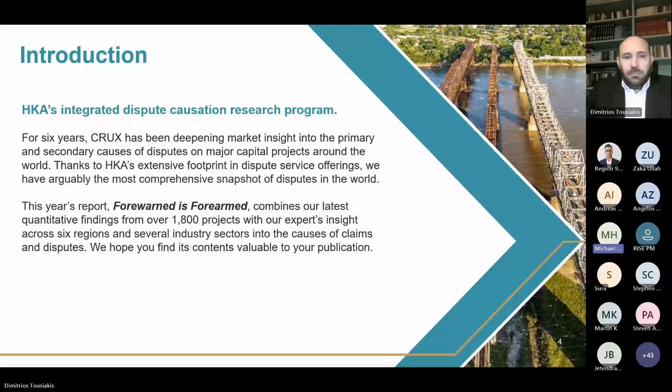So what is Crux? Crux is our own internal research program. It looks at the primary and secondary causes of disputes on major capital projects around the world. This year's report is called Forewarned is Forearmed, and it looks at about 1,800 projects worldwide. The Crux report gives us that insight and examines those causes of claims, disruption, and disputes on major projects.

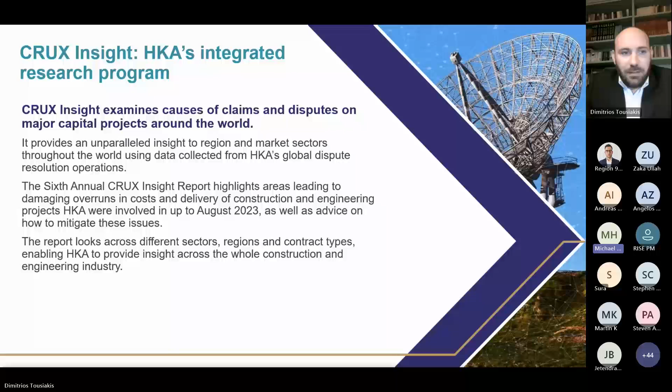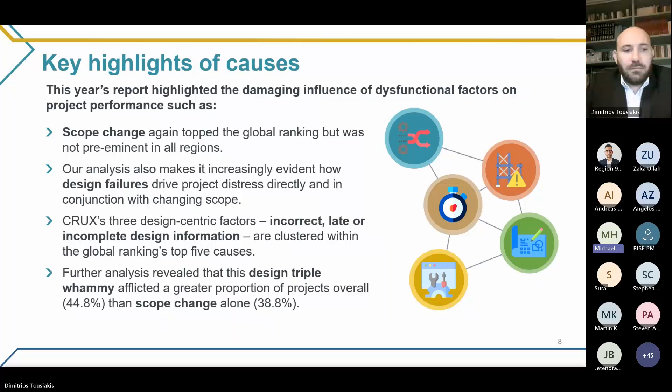We've highlighted scope change at the top. But as I mentioned, the incorrect, late, or incomplete design information, when combined together - that triple whammy - shows that design-related delays and claims are in excess of what we're seeing in scope changes alone.

Now we're going to come on to linear projects. What do we mean by linear projects? The characteristics of linear projects are longitudinal, spatial, and repetitive construction activities - for example, tunnels, pipelines, bridges, rail and transport, and roads and highways. That's how we classify it under our Crux data. It's the repetition of those activities, and it's highly dependent upon efficient production rates and optimum resource utilization for those repetitive activities. That's the key thing to consider there.

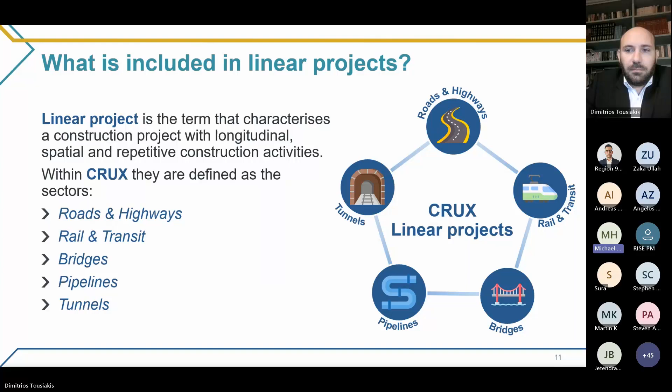Average cost is pretty much the same there as well. Now, when we look at the actual top causes...

We have change in scope being relative to both cases, but that's where it starts to diverge slightly, because obviously in linear projects, there's more restriction with access, maybe in terms of physical conditions where they were unforeseen, and design being incomplete, or indeed the design information being late.

Now, is that because there is a less series of activities there in comparison to the non-linear projects? We'll leave that one out there for you to have a think about, and maybe when Dimitrios explains his content, that will become even more apparent.

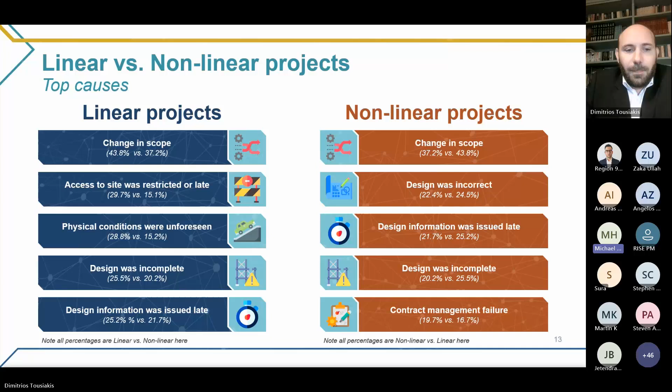So whilst we have got activities there with scope change and design issues quite heavily biased in the top 5, there still remains that human-based element of administration of the contracts that causes a dispute level situation.

How does that reflect with the projects you're actually on? How does the data that we see in our sectors, in our geographical locations, compare to your own? It would be interesting for anybody to give their feedback on that, on what they see and if it's comparable on their own project.

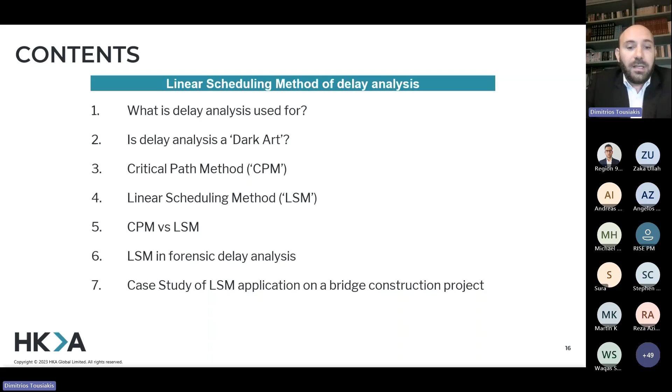At the end, I will present a case study of linear scheduling method application on a bridge construction project, in order for you to understand a bit better and see the graphs and graphically understand how LSM can be used. But first of all, let's start from the basics.

What is delay analysis used for? In general, delay analysis is used for examining the time loss of a project or an activity. In order to assess the impact of the changes and delays on a project, someone needs to carry out a delay analysis.

This involves a critical path analysis, where we identify the critical path activities, which then enable us, and the legal teams, to focus on the critical delay events and save time rather than investigating all the delays of the project. As you probably know, there are a lot of delays in various areas of the project that require factual investigation, which is time and money consuming.

So finally, delay analysis is also used by the parties in a dispute to support or defend an extension of time claim, and by the delay expert to support their expert witness evidence given in court, arbitration, or other proceedings.

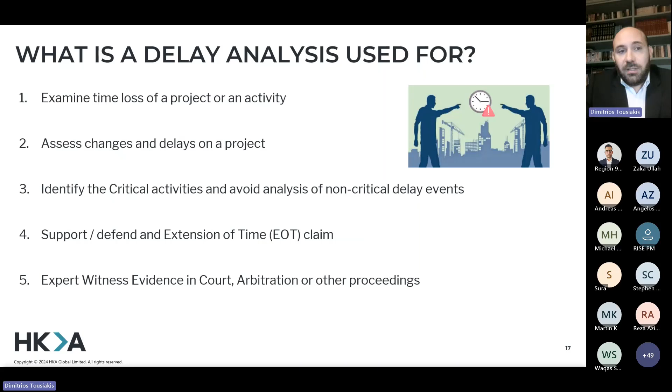So this is what delay analysis is used for, but I'm pretty sure many of you have heard the term, 'oh, delay analysis is a dark art.' Is it really? Or should it be really?

Delay analysis methodologies have different names. For example, the AACE International recognizes 9 different delay analysis methods, while the Society of Construction Law Protocol recognizes 6. In many cases, there are just different names for the same thing, or different things with similar names, and this creates some confusion.

But why should we complicate things? Tribunals, courts and arbitrators prefer non-complicated and easily understood delay analysis. These typically rely on factual evidence, some basic engineering principle, and most of all, common sense. People need to understand what went wrong practically and what delayed the completion of a job.

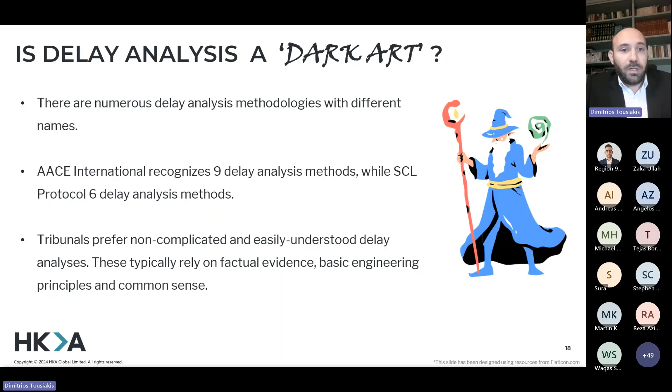So the key takeaway is delay analysis is not and shouldn't be a dark art. It should be easily understood by a layman, someone who has not been involved in the project. But how do we do that? That's the million-dollar question.

Typically, the method that is mostly used and people are more familiar with is the one used by planning software like Primavera P6 or other similar software. This planning software is the most known and used scheduling method in construction management, and you come across it in most cases where people use this software.

With this method, schedules are prepared by inputting data for individual activities - for example, the duration of an activity, the dates, the logical relationship and dependencies between the activities, etc. You put that into the program, and the software then automatically applies algorithms to calculate the free float, the total float, the critical or near critical paths, and the projected completion date.

So the critical path method is a valuable tool that can display graphical visualizations, normally in the form of a Gantt chart, like the one you see on the right-hand side of the screen. These Gantt charts are like a one-dimension overview. Basically, you have the time on top - here are the dates, and here are the activities.

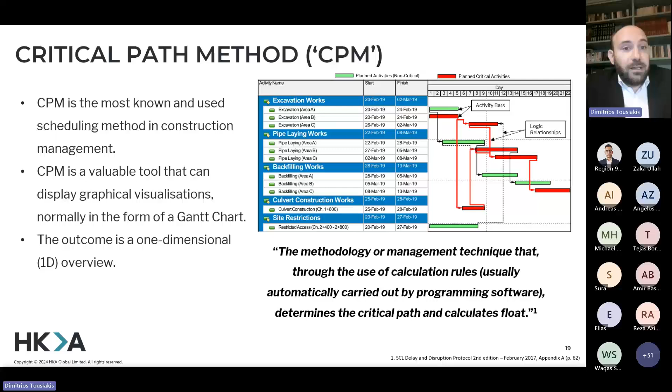Now, what is the linear scheduling method and how does it compare? The linear scheduling method graph displays 2 axes, one for time and one for location, which is the chainage basically. This is a less known method, used for scheduling linear projects or where repetitive activities occur, and optimal productivity rates are essential to achieve timely completion.

As you can see, the graphs are 2-dimension graphs. We have time on the y-axis and location on the x-axis. Using exactly the same example from the previous slide - the same pipeline project, divided into the 3 areas here at the bottom - you can see how things were planned to happen. So here's day 1, 2, 3, etc.

And you can see in brown is the excavation. So excavation in area A was planned to start at the beginning and finish on day 5. At the same time, the excavation in area B would start and finish at the same time. However, excavation in area C would start on day 7 and finish on day 11. Then after doing the excavation, we can see the pipe laying activities, the backfilling. So these gradual lines are the activity lines - here we can see activities that happen in a specific area.

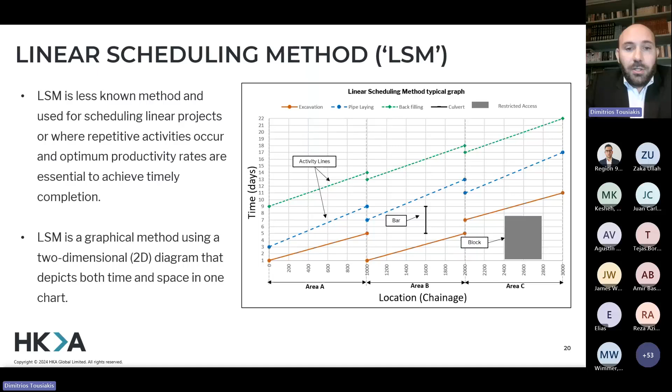So to summarize, the difference between the critical path method and the linear scheduling method: the critical path method creates one-dimensional graphs, which do not visually provide information about the physical layout of the site or any potential constraints or other parameters, and doesn't visually and easily demonstrate the productivity rates for construction activities.

On the other hand, the linear scheduling method is a two-dimensional diagram that enables the avoidance of impact from space restrictions, as we discussed, like the construction of a culvert or site access. It demonstrates and helps achieve optimum productivity for all activities, and ensures that one activity doesn't adversely impact the production rates of the others.

With this method, we can ensure continuity and uninterrupted working of resources by moving the resources from one location to the other. And it's easier to understand from the linear scheduling graph compared to the critical path method.

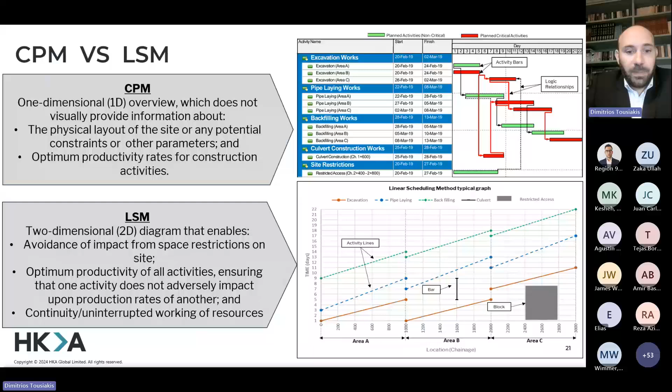So this was for planning of a project, but how is the linear scheduling method used for forensic delay analysis? As you know, construction dispute resolution processes often require a retrospective delay analysis to demonstrate the effect of the delay events. So basically, the analyst or expert needs to look backwards to understand what happened.

The linear scheduling method used for forensic delay analysis of linear projects can display valuable insight of the actual progress of the works in relation to location. And this is the big benefit here.

The LSM can graphically depict the changes in production rates by seeing the change in the gradient of the lines and the interrelationship between the resources, locations, and duration. LSM visual representations are easily understood and read, even by those with little or no experience in construction programme management or project-specific details.

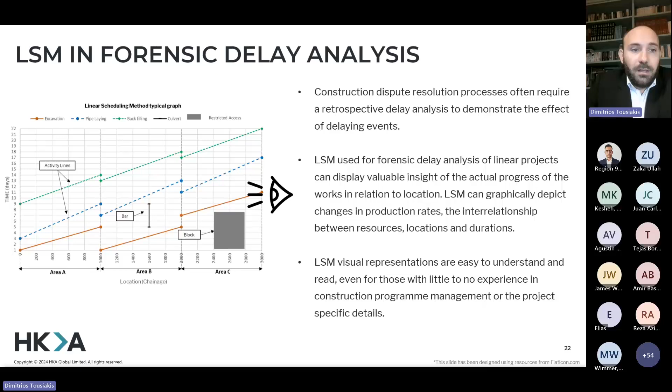So I hope you understood what LSM is in general, in principle. I will try to explain this even better through a case study where we applied it during a forensic delay analysis of a bridge construction project.

The bridge was constructed by application of the span-by-span bridge construction method. As you can see in the photo to the left, we have the piers constructed, and then the launching girder on top, which erects and creates the platform segments. As it creates the bridge, the launching girder moves forward till the end and continues. On the right-hand side is a graphical representation of this.

The construction sequence starts with the underground piling foundation. Then we have the construction of the piers. And on top, we have the launching girder, which erects the platform segments and creates the platform.

So you understand that in order for the bridge to be completed, the main activity we should track to see how things were progressing is the erection of the platform segments by the launching girder, because this is how the bridge is constructed.

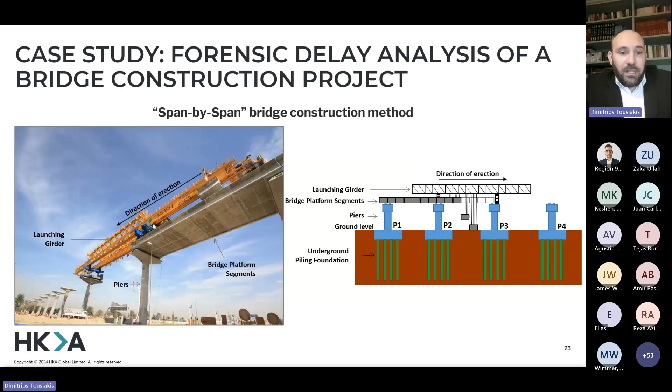So what we did for this analysis, we created a two-dimensional time-chainage graph using the linear scheduling method. You can see on the left, as we discussed, the time, the months of the year, and at the bottom the location, the chainage. This shows only the planned and actual bridge platform lifting by the launching girder.

So observations: just by looking at this simple graph, with the dotted line, you can see that the plan was to start in July '13 and, with this production rate, finish in October '14. So there was a planned duration of 15 months starting from location A to location G. Now, this is what actually happened, which is the continuous line.

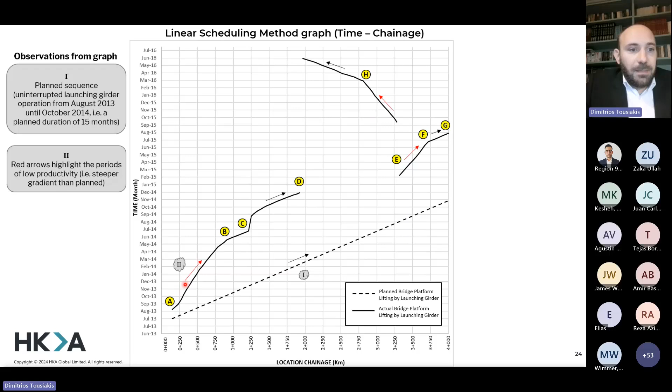The red arrows highlight the periods of low productivity. The steeper the gradient, the more it shows that things were delayed. So whatever is vertical, whatever goes up, is a delay. Whatever goes flat means it was completed more quickly, or according to the planned rate.

Here you can see this took longer to be constructed, while this was according to the plan. This period here, for some reason, had lower productivity, lower rate of progress, and then this was as planned, etc., etc. Observation number 3.

At the beginning of the project, there was 1 month of delay. So instead of starting in July, it started in August. Then we can see here that the launching girder reached location C, where there was around 3 months of stoppage. This is another observation.

Then the launching girder proceeded to location D, where there was a stop. After 2 months, instead of continuing from location D onwards, it moved to location E. So the contractor either decided or was instructed to divert from the planned sequence and relocate the launching girder to location E, which created a 2 months delay.

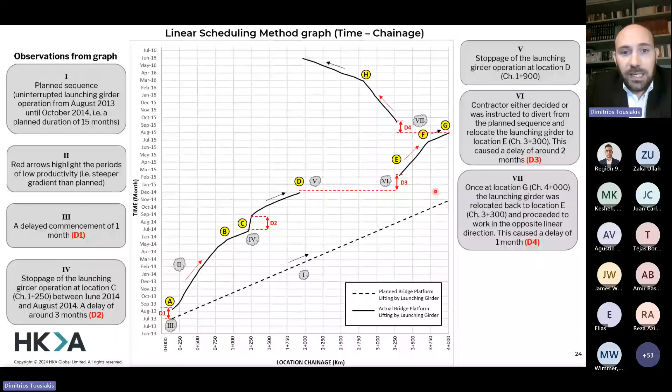Then the launching girder proceeded to location G, and then it moved back to location E and proceeded all the way until here. We can see that from G going back to location E, it was delay 4, approximately 1 month. Eventually the bridge platform construction completed at location D in May 2016.

This is 19 months later than the planned completion of October 14. So just by creating this very simple graph, we have an overview of the delays of the most important activity, which is the construction of the bridge platform.

And we can then focus on the periods, the red periods here, where the big delays were, or in the periods where we have the red arrows, where basically the rate of progress was slower than planned.

Now, okay, we have this, but then what else can we do with this linear scheduling method to investigate even further? What were the causes of these delays? We can enrich this graph by adding much more information.

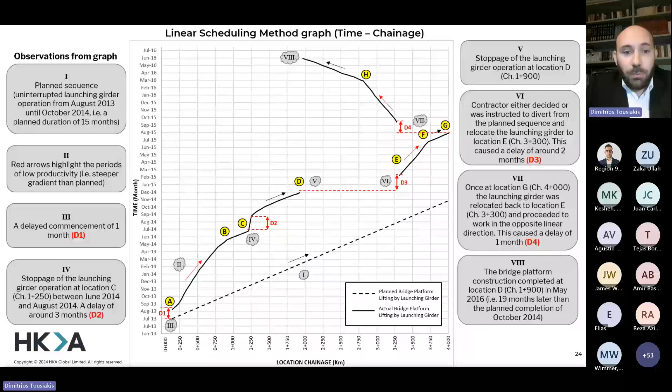And this is the next slide. I know it looks like a mess, but don't be scared. This gives the information of what happened, because what we have here is the same graph.

The dotted black line is the planned launching girder. The continuous black line is the same as the previous graph. But now we have enriched the graph with areas and periods of lack of access, here and here, the gray ones. We have also enriched the graph with the actual piling design, and we can see that the piling design was typically taking like 3-4 months.

But in this location here, for some reason, between 1,250 and 1,500 meters, it took much, much longer. And also we can see in green is the actual pile construction, so when the piles were constructed, and in blue is the construction of the piers.

So now we have taken all the information, we have put it in the graph, and we can draw even more conclusions from this. Basically you can see here, we said that there was a delay at the start.

So could it be because of the lack of access? Possibly, because then after having access, you could only start building your piles and your piers, and then you could start your launching girder, considering that there is some time to install.

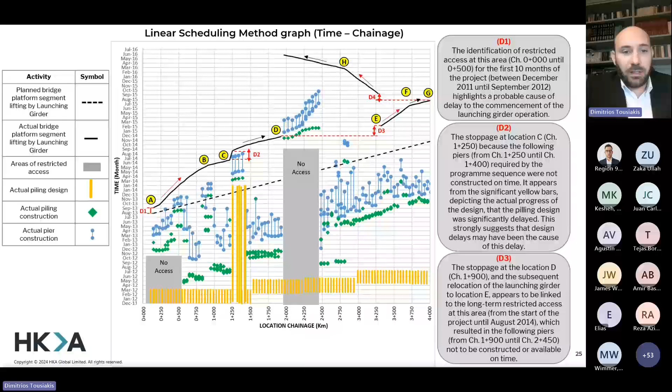Of course, you can enrich this graph even more by inserting information like the soil conditions. For example, if the progress was slower than planned, maybe it was because the underground conditions were rocky, while the rest of the project had soft soil. So maybe the contractor didn't expect to find hard soil conditions, and this could explain the delay for the slow progress from A to B.

And also, over time, we can plot the number of available resources, or maybe the production of concrete segments from the factory, and then correlate this with the actual progress and draw more conclusions out of it. You can see how this little graph captures so much information, and you can draw so many conclusions which can easily be presented and understood.

So imagine going to arbitration or to the court, presenting this graph, or going to your client and employer to present a claim, explaining the story. This graph tells the story so clearly, much more clearly than the bar charts.

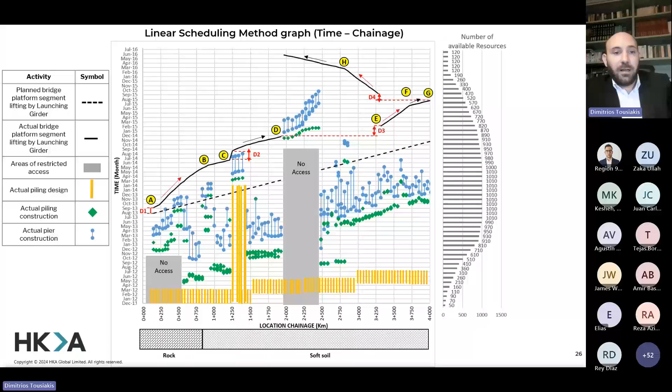However, it's not the answer. It's not always the answer. LSM has its limitations, especially for forensic delay analysis. First of all, it requires available, detailed, and accurate records, and actually in the correct format.

So to create these graphs, you need information about when the launch girder progressed and where it stopped. You need information about the design, the restriction areas, the construction of the piers, and all this ideally should be in the correct format so someone can insert it into these time-chainage graphs. If not, it will be hypothetical, and if it's not in the right format, it will be very time consuming to create these graphs.

There are some software tools available that use time-chainage graphs, but you can even do it in Excel. For example, this analysis was done in Excel.

Now, in contrast to the critical path method, the LSM is a graphical method that does not rely upon an underlying mathematical model. Consequently, the conclusions coming out of these graphs, especially regarding the critical and driving activities, are based on the delay analyst's observation, construction knowledge, experience, and common sense and understanding of the graph, rather than automated software calculations.

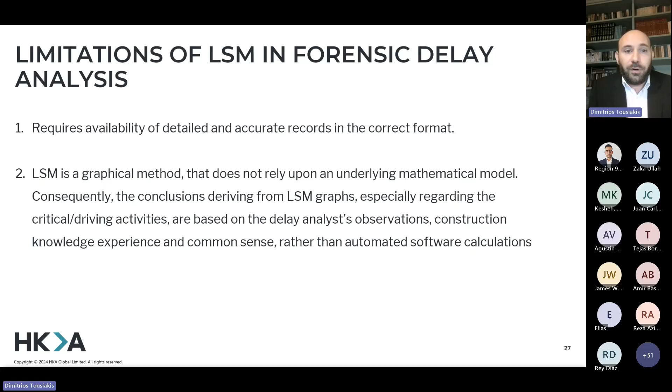As a final point and a personal point, I would like to dedicate this presentation in memory of Apostolos Stigas, who was a pioneer of human resources, a mentor to me, and a great man who was my father-in-law and passed away 3 days ago. Sorry for that, and thank you for...